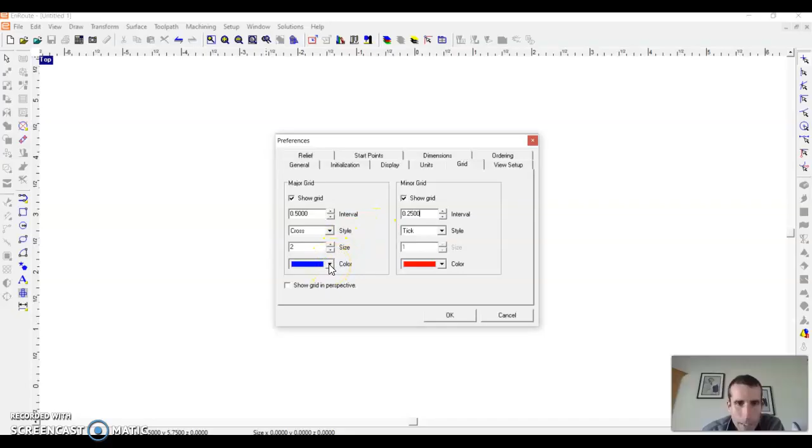So now I came over here and decided to change my color. I did a blue and a red grid just so you can kind of separate them. This is just a preference thing, you don't have to use a grid at all, obviously. So now watch when I hit OK, you'll see the grid, and I can zoom in and out.

If your mouse has a little roller on it, like this one does, that works really good for zooming. Some of those get a little dirty or dusty. Some students like to bring in their own mouse, you just plug it in, and it's kind of nice to have that. So basically that's the best way to zoom, really. You can also go over here to view, and there's lots of zoom functions to help you zoom. That's the one I use the most, and then zoom in or out, or the different things.

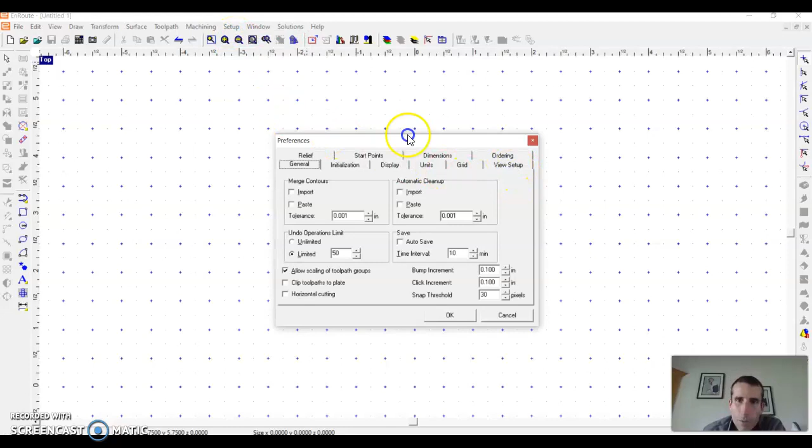One thing that I've had students do for years, that I've kind of leaned away from, but if you go to preferences and view setup, you can turn on or off the plate. So here's the plate, it's this red box, and that represents the cutting area. Some of the assignments ask you to make a plate, and that's just to help you contain the cutting area. So if I click on this button, it will let you change where the plate is.

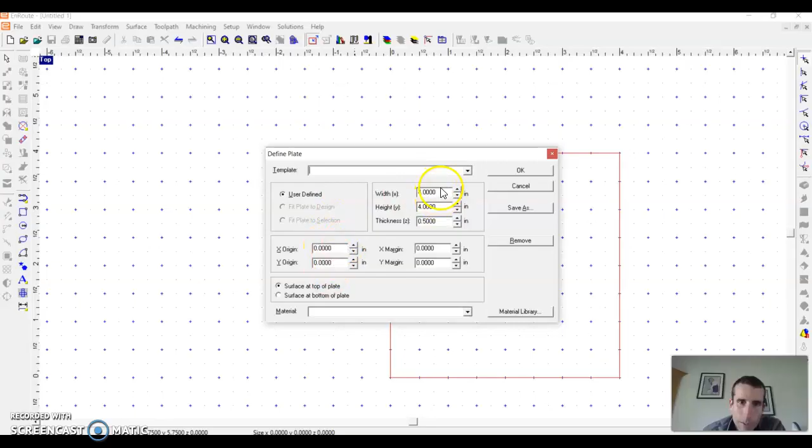One thing that's really important is that the X and the Y are at the zeros. You can type in your width and height of the plate, then hit OK, and that's how you can change the plate up a little bit. I think I'm going to turn the plate back off just for this, I think it'll be a little bit nicer, so I'm just going to uncheck that box, and then hit OK.

So basically, the next step is to just start drawing some lines. I'm just going to go draw a line, and you can see how it's jumping right to my dots. That's really a handy feature, and that's just a snap setting. Over here I have some snap settings, and those are like helping hands to help me figure out exactly what I'm trying to do. So that kind of helps out.

One thing that I like to do is just type in my measurements. So I come up here and click on this box, and this helps me input specifications of what I'm trying to do.

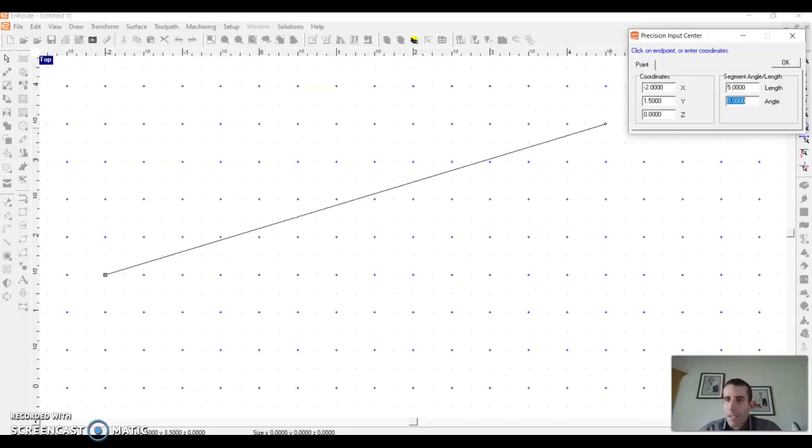So if I go draw a line, I'm going to let the snap jump here, and then I'm just going to type in the length of my line. Let's say I do a 5-inch line. I tab down, that helps me get to the next box, and then I think I'll make my angle at 0. Then I hit tab to OK, and so there it did, it just drew a 5-inch line at an angle of 0.

So now maybe I want to go up 1 inch at an angle of 90. So 90 is going to be straight up, and there we go. So now I'm going to go back over 5 inches.

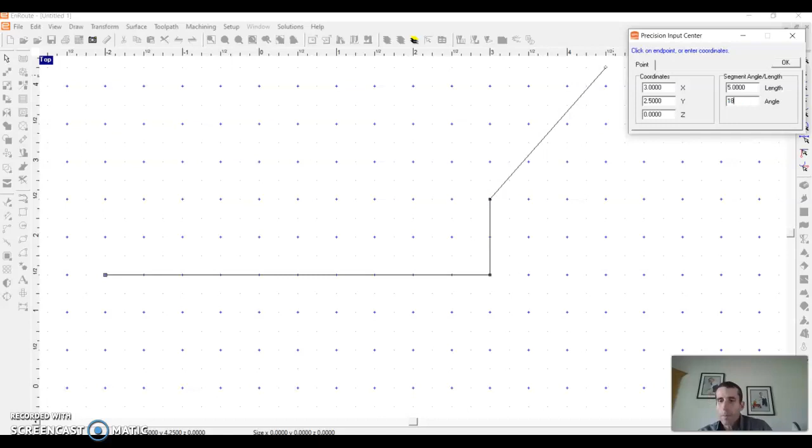Maybe I'll just do 5 inches at 180. Okay, so that went back over that way. And now I'm going to go down. So I'll just go 1 inch down at an angle of 270.

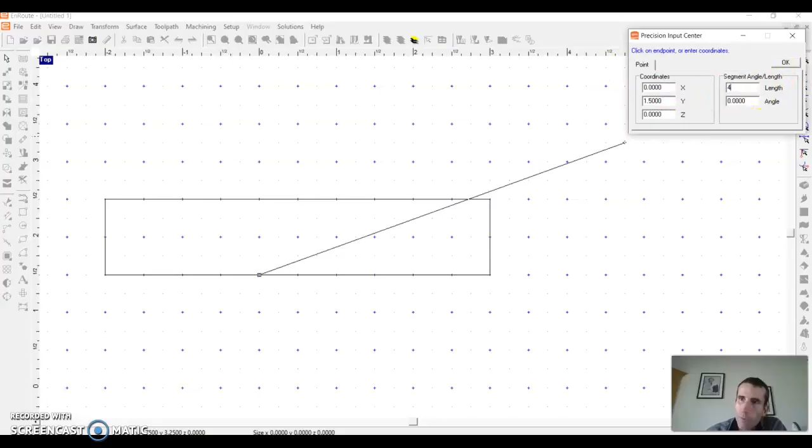Remember, you have 360 degrees, and that's all you're doing, is you're just working around your angles. So if I start right here, and I do a 2-inch line at an angle of 45 degrees, it's going to look something like that. So you just have to remember, you start from your center point, you have a 360-degree circle. That's how you figure out those.

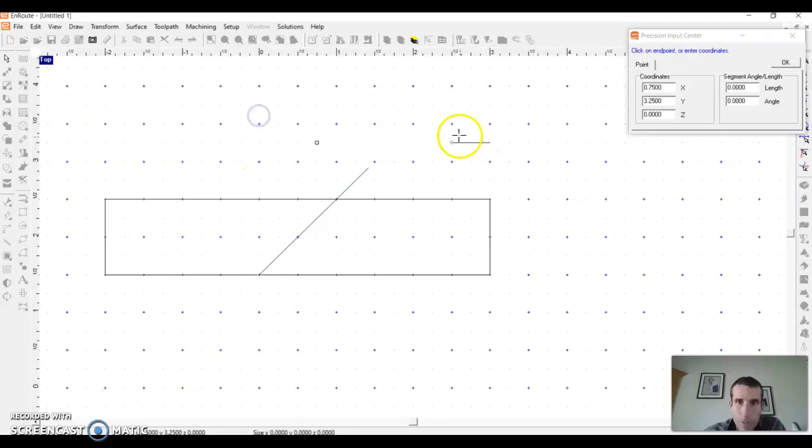Now when I go one line over, see how I just click and then I can break that line back off with the right button. So your left and your right mouse buttons, they kind of do a certain thing, so you'll learn kind of how that works. But when you're trying to exit out of a command, you just hit your right mouse button and that breaks you out of that command.

All right, so those were just kind of drawing some lines, and maybe I like to draw a rectangle. So if I come over here to rectangle, notice this whole settings, there's lots of settings that just opened. So I can draw a rectangle by putting in the measurements. So I'm going to do a 4 by 4 rectangle. Well, now it's really a square, right? But I could place it where I want to place it.

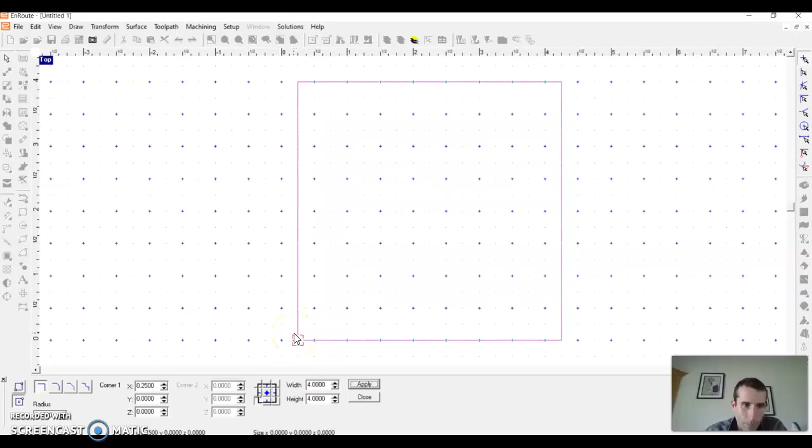Or perhaps I just want to drag and sketch a rectangle. So I can do that too. And that's another way to do it.

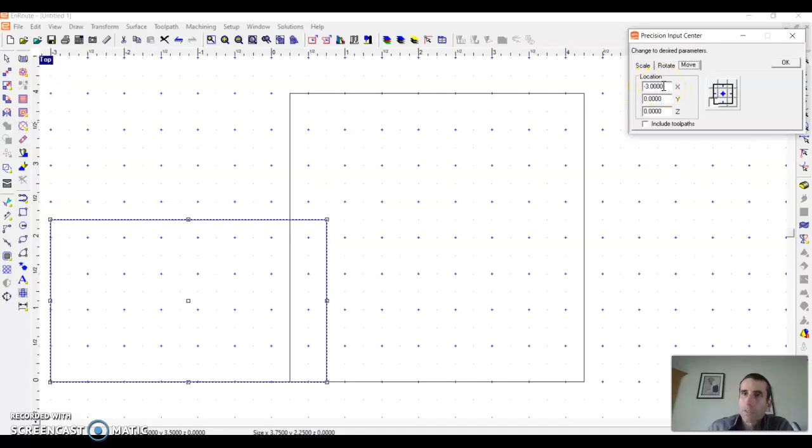Now if I click on this again, I'm going to open up my box over here. If I click on this, you'll notice if I go move, in the X value, it is negative numbers. So whenever we actually send this to the machine, we can't have any negative numbers. So I need to make sure I move my shape to a positive value number. So I'm just going to set this at 0 here.

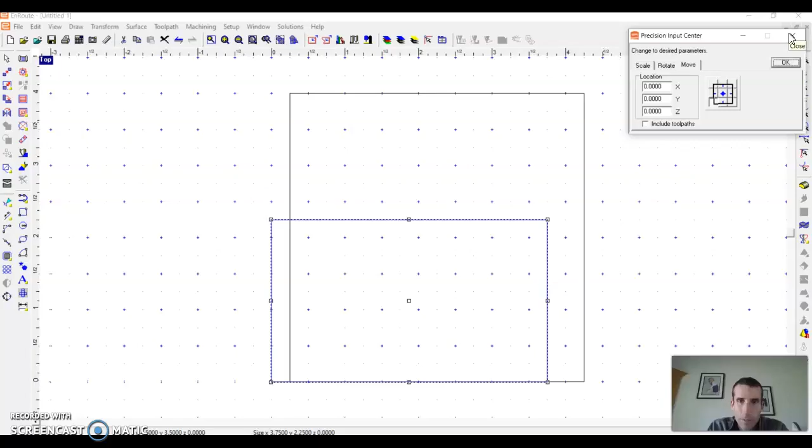And I'm going to tab over, and I'm going to move that rectangle to a 0 value. So I can move from the center of the shape or whatever corner I want. But ultimately, when we go to make something on the machine, we're going to have to zero it out. So the X and the Y and the Z should all be 0 from where we're moving something. So that's kind of handy.

I mean, you can grab shapes and stretch them and change them. It's still on the grid, so it's snapping on the grid. But you have to kind of be careful, because some of them, if you're trying to be really specific, stretching them and changing the shape isn't the best idea.

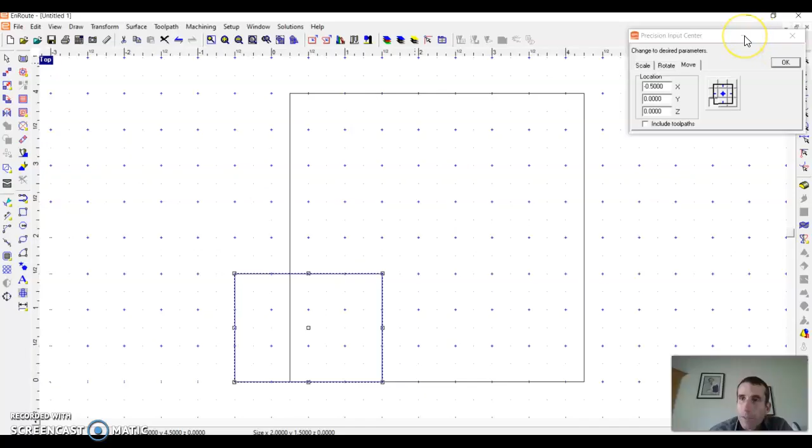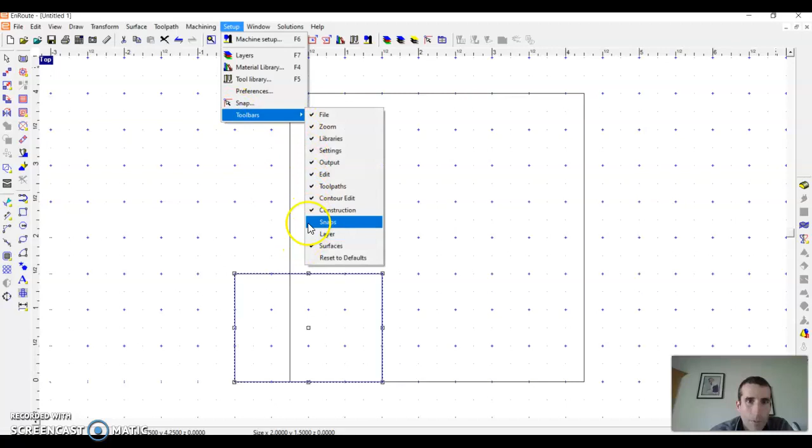As we go through the assignment, you're going to find a lot more assignments to help you out. If I don't have my snap keys here, let's say I go setup, let's see, this is under toolbars. And if I uncheck my snaps, see how they're gone now, and then I go back here to toolbars, snaps, and then it opens them back up. So if you're missing something, you might just have to make sure it's set up right to kind of help you out a little bit.

So lots of commands to learn. As you start going through this, you'll start to figure them out a lot. If I go to circle here, there's a couple ways you can draw a circle, but this is by radius. So remember, radius is half a diameter. So if I want a 1-inch circle, I'm actually going to have to change that to a radius of a half inch. So now if I measure across, it's 1 inch. So that kind of helps me out a little bit.

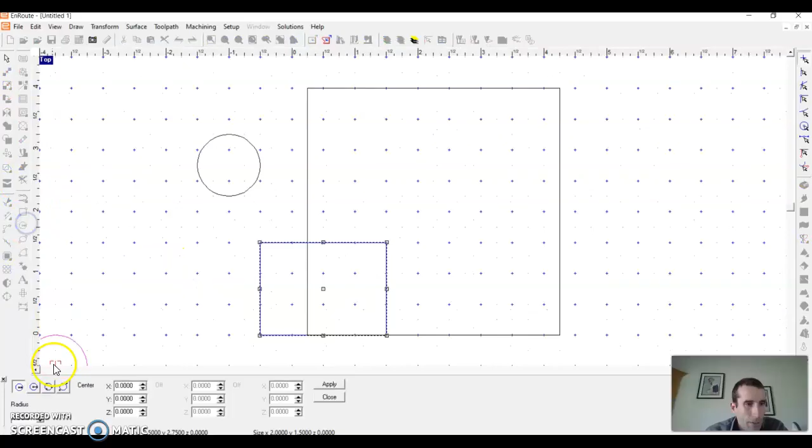Another way to draw a circle is by hitting this button here, and that stretches it. Okay, it stretches it out. I'm not accurately measuring anything, but it's a way that you can work on a circle.

So we went over the plate a little bit. I showed you how to do the grid. I showed you how to do a couple lines, a rectangle and a circle. And on the next video, I'll show you a couple more things. Remember, you can always go back. If you mess something up, you can go back to undo it. Not a bad way to do that.

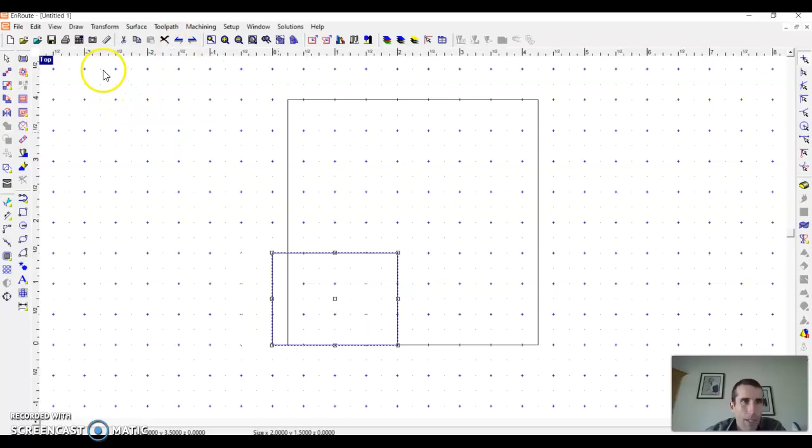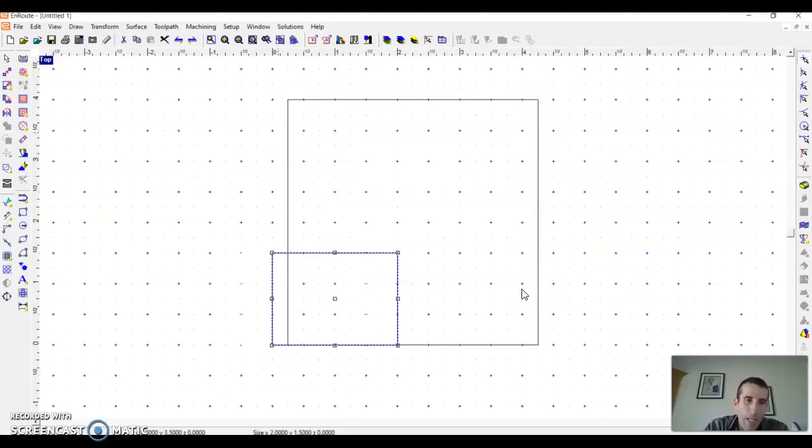There's a built-in calculator that you can use that will just kind of help you out with some of your images. I will have you do a couple screenshots. So if you click on this, this will help you take a picture of what you are working on. So you're going to want to change this to probably a JPEG image, and then you type in a name for this, and it will save your screen as wherever you left off. It's not very accurate. It's not a file you can do much with, but it is kind of helpful.